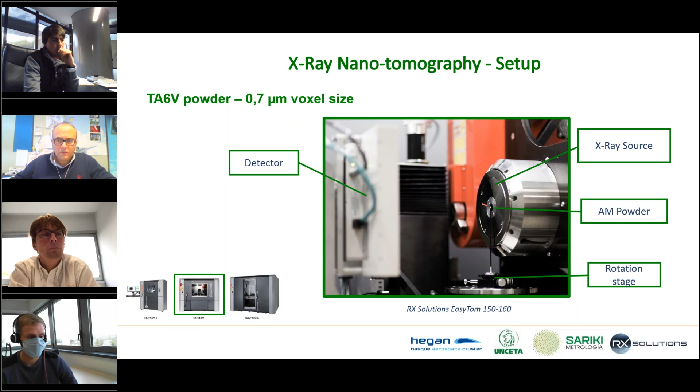On the left, we have the detector, which is counting the photons and gets all the information. In that case, you can see on the bottom left, we are using our EasyTOM, which is the middle range of our systems. So thank you. We can see the result we can obtain on a powder. So once the scan is done, the software will reconstruct the 3D of the powder, so you can have all the information inside your powder.

So on the left, you have a 3D rendering where you can see the volume of the different cells. So it can be very useful to check if all your cells are inside the range you want. And of course, on the right, you have a slice through the powder. So it can be also useful to check the volume, but you can start seeing some porosities inside. And of course, you can also check the roundness of your powder. So a lot of information available inside the sample, and the technology is of course non-destructive. So in that case, you don't move the powder during the process and you get all the information.

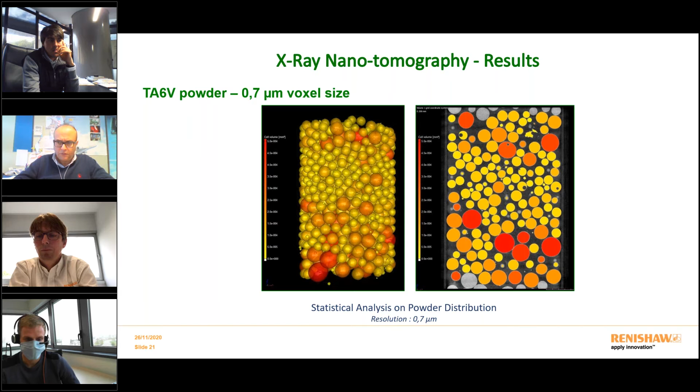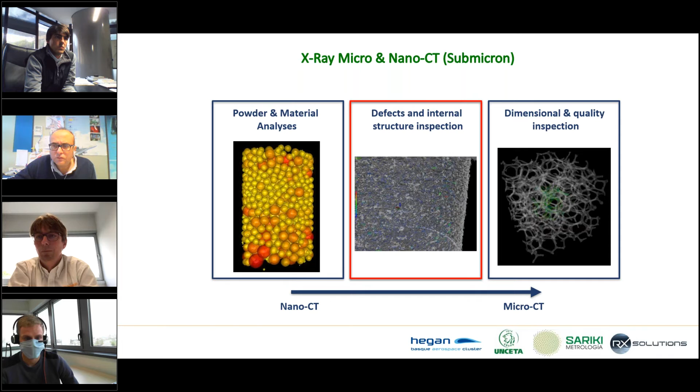Okay, so the first application was about powder, very small sample and very high resolution. And then if we go into smaller resolution, we can observe defects and internal structure inspection. So this is in the range of 10, 20 micron. And we'll have a look at some specimens. So we can see on the left, we have a setup with a titanium specimen. So it can be a test for testing the melting setup or to test your first sample on the machine.

And in that case, we use 20 micron voxel size because we are looking at some porosities or inclusions inside. So you can see on the right, we have the 3D reconstruction, and we have performed the porosity analysis inside, and it can be really useful to check if you have some big pores during the melting process.

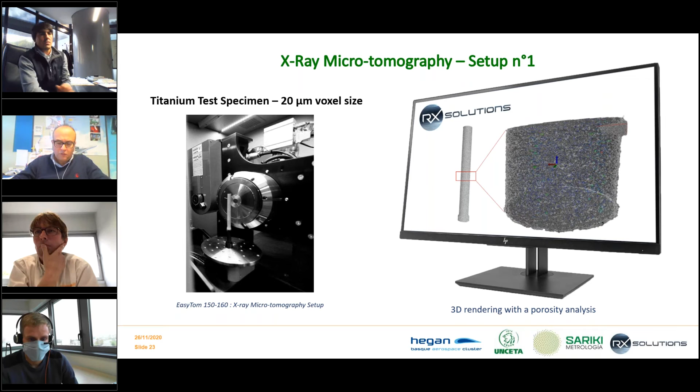So again, we can have a look at the 3D rendering on the left. So you can check the surface if everything went right. But you can also have some slices. So in the middle, we see the porosities inside the specimen. So again, it really depends on the resolution, but you can be able to see some big pores and to check their dimensions and to see if it is right for your process or not.

On the right, we have the difference that can be seen between a melted and an unmelted powder. So we've just drilled a hole in the sample and we've put some powder inside, and you can see how easy it is to see the difference between the melted powder and the unmelted one.

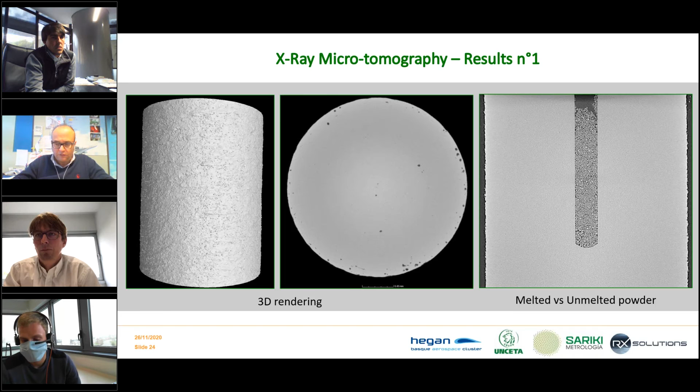So another application, so now we are entering the bigger system we propose, the EasyTOM XL, and we use a different setup where you can see the sample is farther from the tube. So the resolution is now only 100 micrometers, but it allows to scan a much bigger part. So in that case, because the detector can move, it's possible to use some options to get the entire part in the field of view. So at the end, you will have a complete 3D reconstruction and you can check for defects inside the entire component.

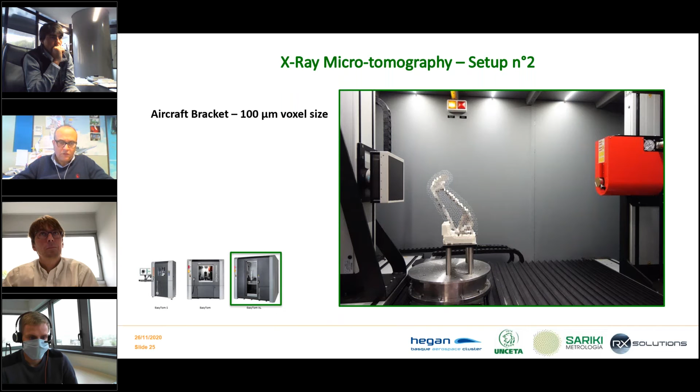So we have a look now at the slice inside this component, and you can see the resolution is 100 micrometers, so we can start seeing some defects. In that case, we'll be limited to compute small defects, and the idea could be to use the same system and bring the sample closer to the tube.

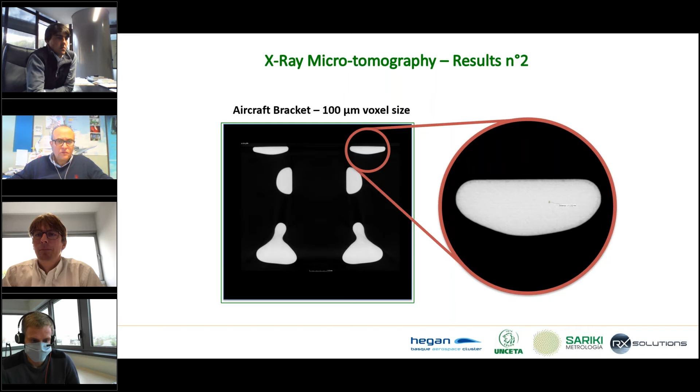You'll be able to have a higher resolution and then to see what your defect really is, if it's a pore, if it's an inclusion or whatever. But of course, you can see that a very low resolution scan can be useful to check the biggest defect, and you can go through the entire part.

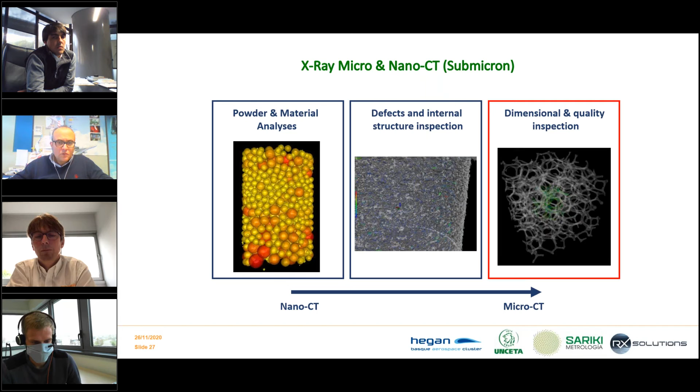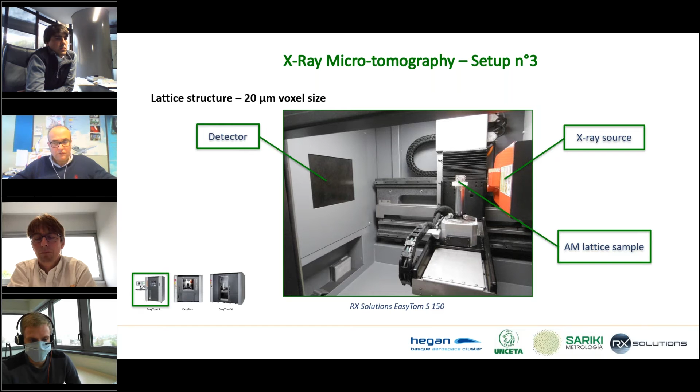And we can again see the X-ray source on the right, the detector on the left, and our part in the middle. So in that case, we are scanning a lattice structure made by additive manufacturing. And you will see how easy it is to reconstruct the entire volume and to really look inside. And we are able to measure the inside of the lattice structure.

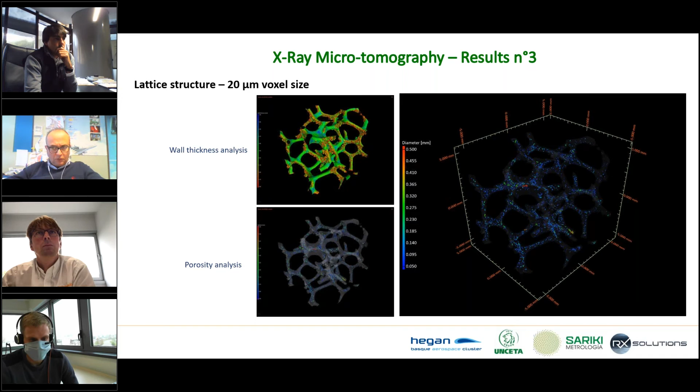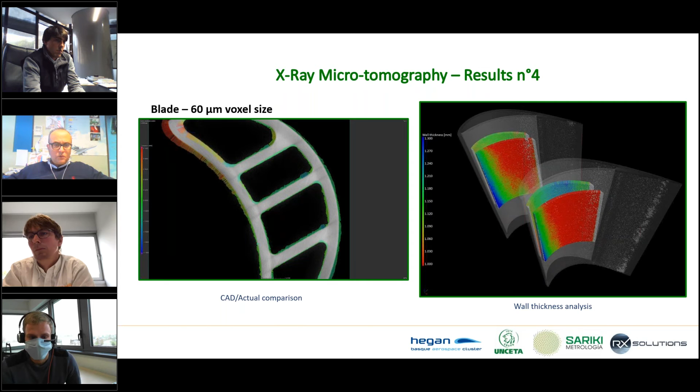So we've seen some applications for 3D printing, from powder to metrology and inclusions, etc. But what you need to remember is that we have a lot of applications for CT. We are providing a wide range of equipment, with different powers and different resolutions. All applications are related to R&D, research, or material sciences, and it's a non-destructive technology.

So in this presentation, we've seen powder and material characterization when we work at high resolution. We've also seen some defects in inner structure, so you can work on a specimen or small sample to check your process. And the last applications were linked to dimensional and quality inspection. So when you really want to compare the measurements and do metrology, you can use some options to get your entire sample in the field of view. So really some interesting applications for 3D printing.

And finally, about RX Solutions and our partner Sariki in Spain. We are a French company manufacturing CT systems, and all the hardware and software are designed by us, with a wide range of algorithms to reconstruct the projections and to correct some artifacts well known in computed tomography.